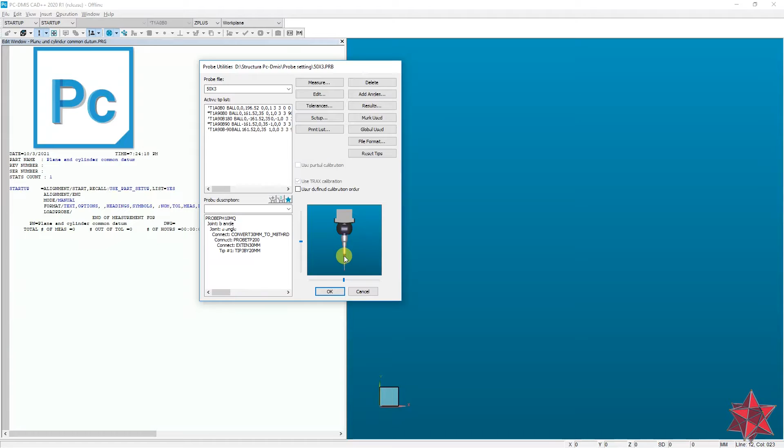The first thing PCDMIS will ask you to do is choose a probe that you want to work with. I'm going to choose this probe from my defined ones, 50 times 3, so I have a shaft of 50 millimeters in height and a tip diameter of 3 millimeters, and I will work with an angle of A0, B0.

Second, after you define the probe, you will want to set your preferences for the program. You can do this by pressing F10 on your keyboard, or by going to Edit, Preferences, Parameters. At Motion, we can set the desired prehit and retract distances. This lets the software know what distance from the surface it is supposed to go before and after it touches.

Set the move speed to 200, but if you are new to PCDMIS, please work with 80 millimeters per second to avoid collisions. Leave everything else as they are and click OK.

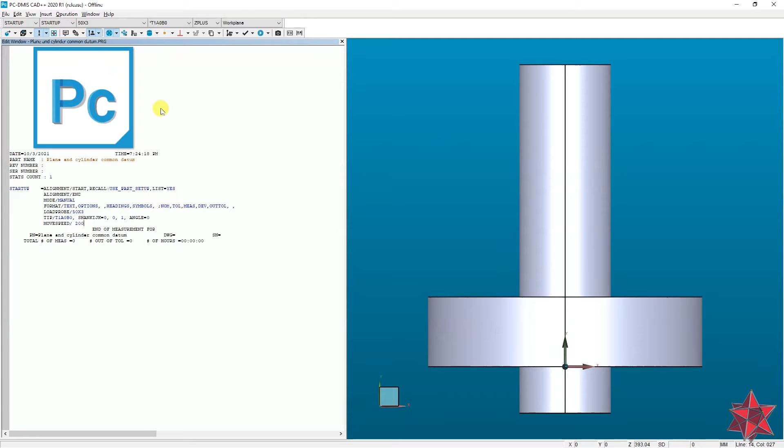Now you will want to import the CAD model. You can do this by going to File, Import, CAD, and here you will have to choose the file extension that you have the CAD with. In my case it's a STEP file, and it's already imported.

Now that we have the CAD model imported, check if the CAD model has the axis oriented as the machine axis. If it's not, then we will have to set it. So how do we check it?

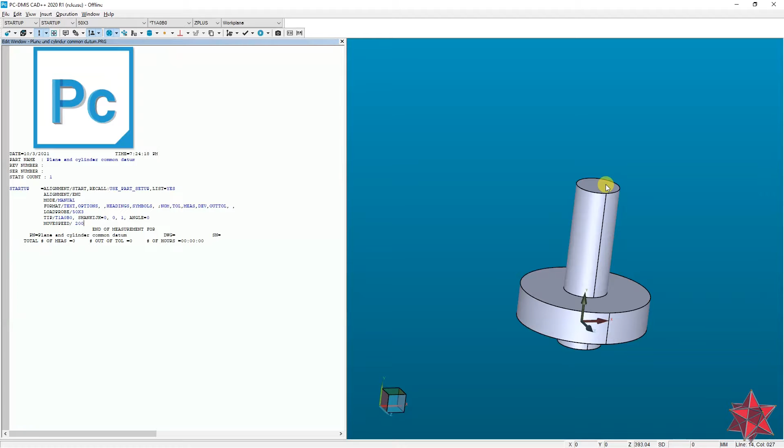We can look at the CAD model that we have here. The y-axis is represented on top of the cylinder, so this is the axis of the cylinder and the y-axis is on it, and we want the z-axis to be on top. So we have to rotate the alignment of the part on the x-axis. So how to do this?

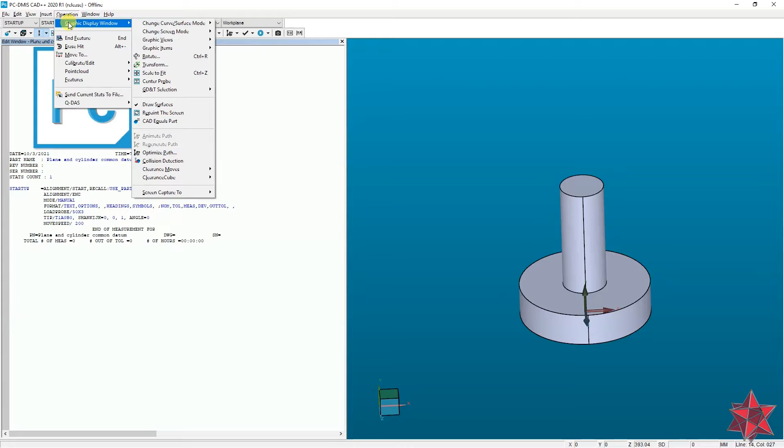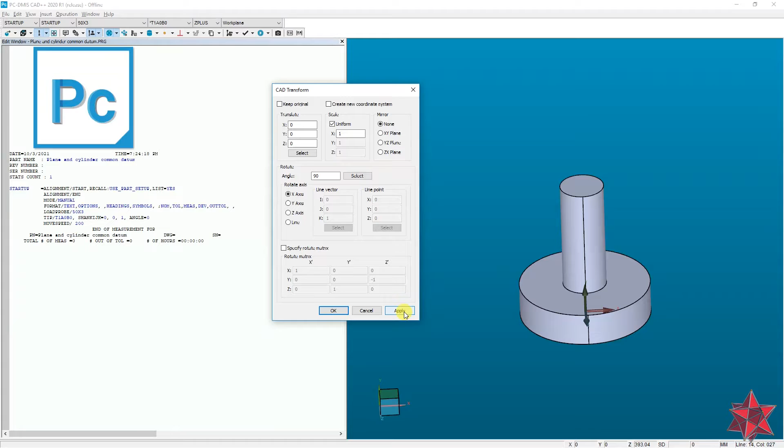Go to Operation, Graphic Display Window, and Transform. Here at Rotate, we set the angle at 90 degrees because we want it to be on the plus side, and set the x-axis. Then we press Apply, and that's it. The z-axis is now facing up.

Now keep in mind when you do transformation of the alignment that you first have to make the rotation and then the translations. So keep this in mind. Now that...

...our CAD model has the axis as we want, the next step is to define the way the machine will move around the part in order to avoid collisions. There are several ways to do that, but for now we will use a clearance cube.

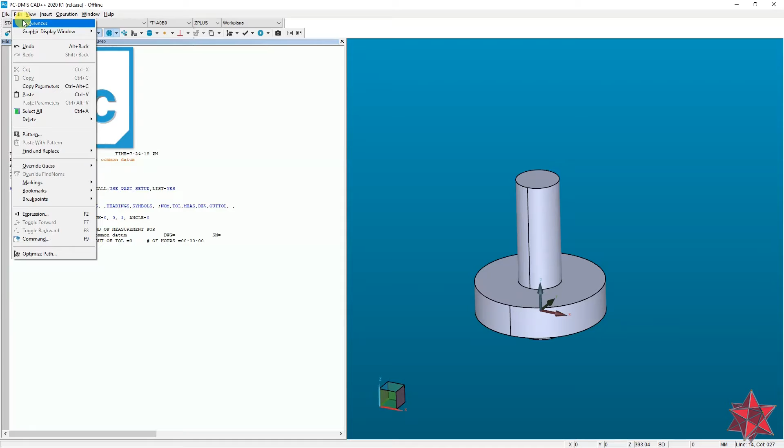So how to do that? Go to Edit, Preferences, Set Clearance Cube. Notice that the window is a simple window and it has only an offset value of 10 millimeters. That means it will make the cube 10 millimeters from all sides of the CAD model. You can also show it right here and activate it.

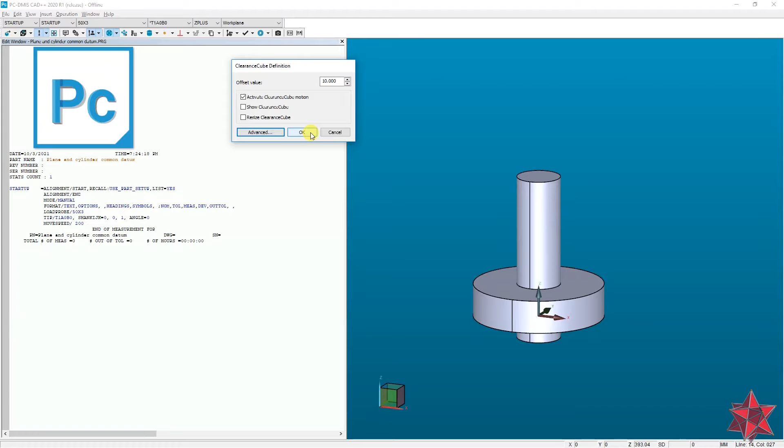Clearance cube motion: if you go to advanced, you will have more advanced features, but for now simple is fine. Just click OK. So now the probe will avoid moving within 10 millimeters of the part.

Now that everything is set, we have to let the machine know where the part is located in the measuring range. The way we do this is by making a help alignment with elements from the part and by using a few points on the elements.

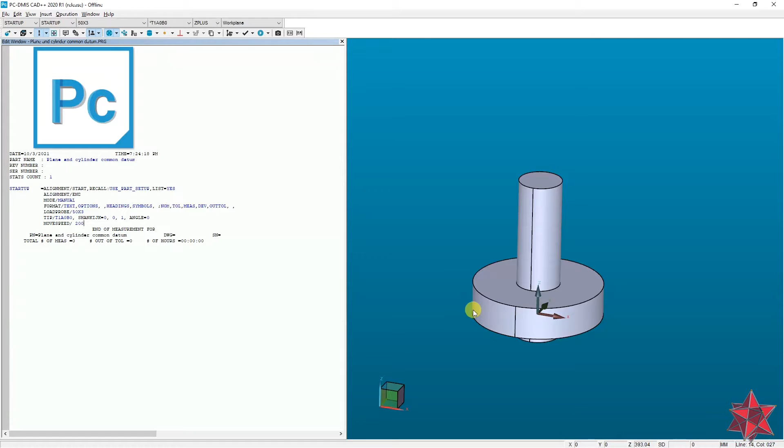First, press Shift on the keyboard and select the plane. Right here on Strategy, use Plane Circle, so it's a circular path on the plane, and click on Apply.

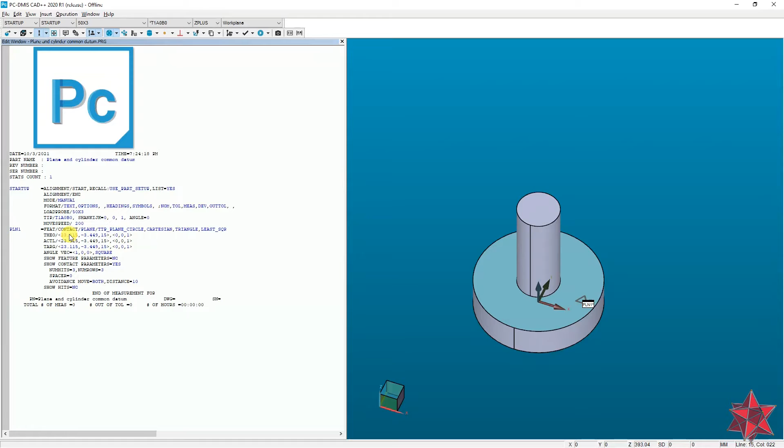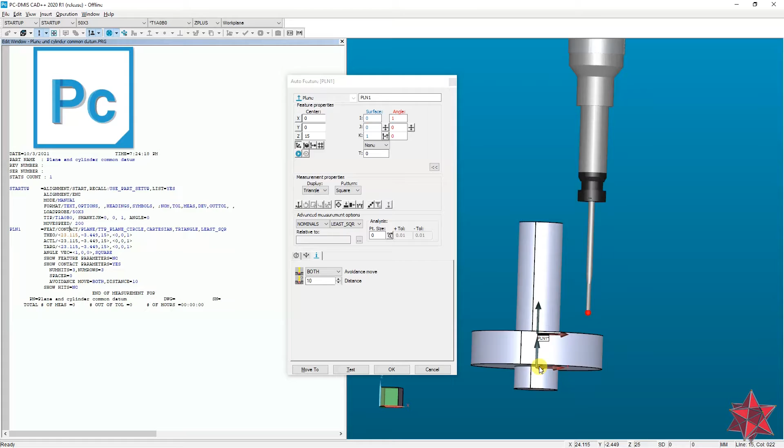Then go to the editor window, click on somewhere where the plane is, and press F9 on the keyboard to edit the plane. First of all, we want the plane to start from the middle, so we will put the nominals at 0 and 0 on the x and y axes. The plane has a height from the origin of the CAD model of 15 millimeters, as we can see on the z-axis, so we will leave it like this.

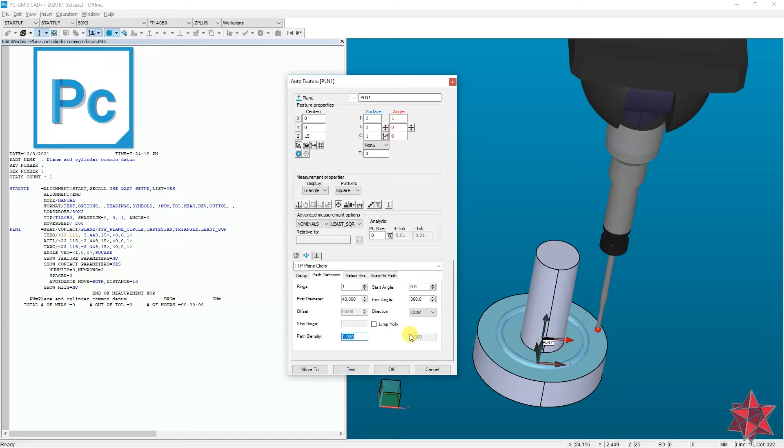Now we have to select the measurement strategy. Go to Path Definition. We only want one ring. Let's set the first diameter to 40 millimeters - yes, that's okay. For the path density, we will need few points, so we will put 0.04 at the path density to have 5 points on the plane. Everything looks good, click OK.

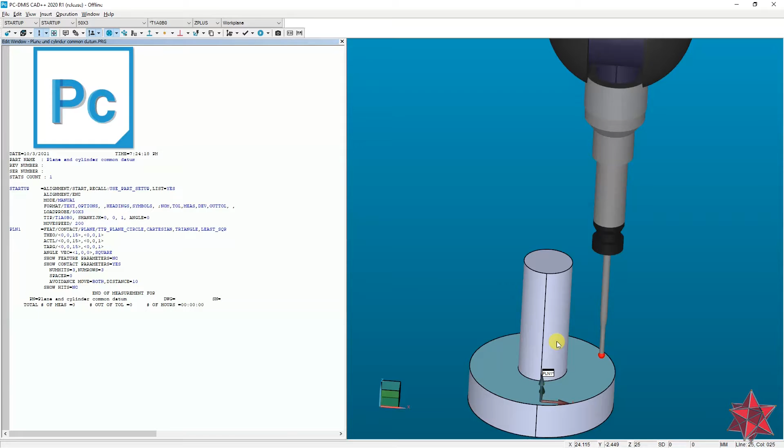Now we want to make a circle because we don't want to make a lot of points to make a cylinder - we only want to make a circle right here to move very fast through the program. So the way to do this, if you don't have the elements tab here, go to Insert, Feature, Auto, Circle.

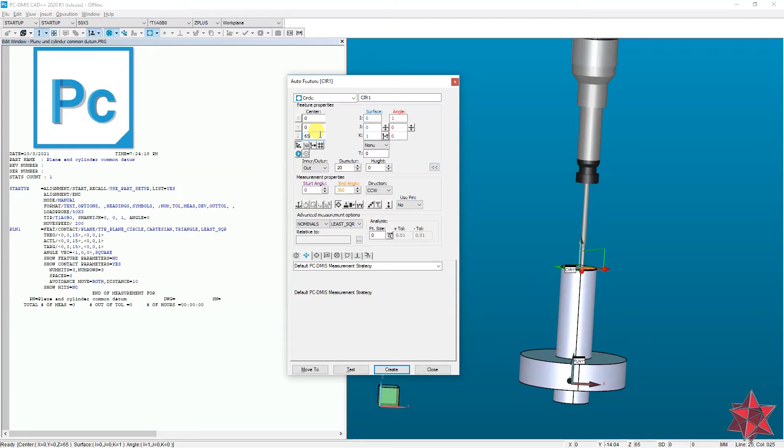Now click on the cylinder at the top, and it will put it exactly at the top. The software wants to measure the circle exactly at the top, but we don't want that, so we can see that it's at 65 at the top. That means the cylinder from the plane to here has 50 millimeters. That means if we go at 60, it will be fine, so 5 millimeters from the top.

Okay, 360. Go to Contact Path Properties. 4 points is enough. We don't need the sample points, we don't need avoidance move, we don't need anything. Just create the circle. Good.

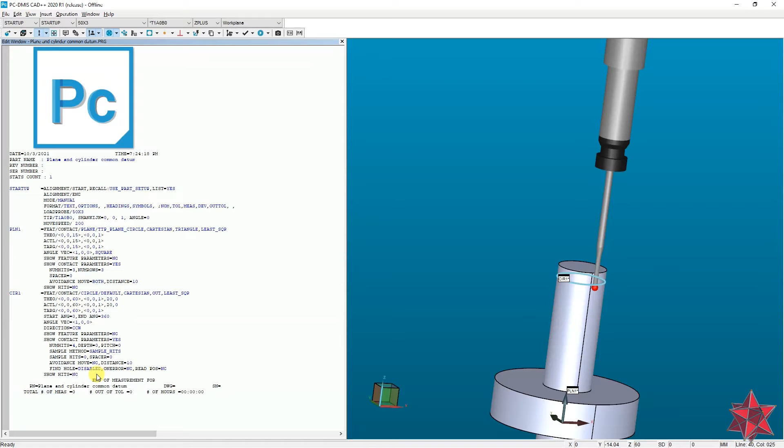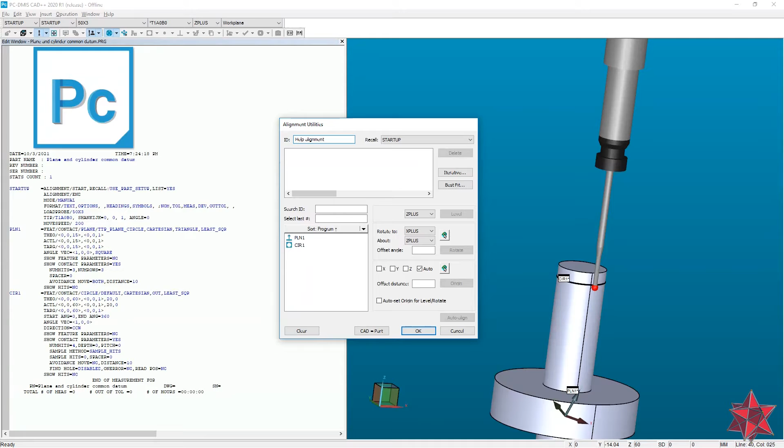Now that we have the circle and the plane, we can make our first help alignment. Go to Insert, Alignment, New. Rename the alignment as Help Alignment 1, and set the plane.

Let me just tell you that the thing I love about PCDMIS is the graphical, visual way it shows you the alignment as it moves when you set the elements. Notice this: now the alignment moves in all directions, and if I set the plane level Z plus, this took 2 rotations. So we only have 1 rotation now and all the translations, and it rotates like this and moves in all axes because we didn't take any translation. So we took the 2 rotations. Now let's also take the origin on Z axis on the plane, and the origin on X and Y axis on the circle. Now it only rotates in one direction, around Z axis.

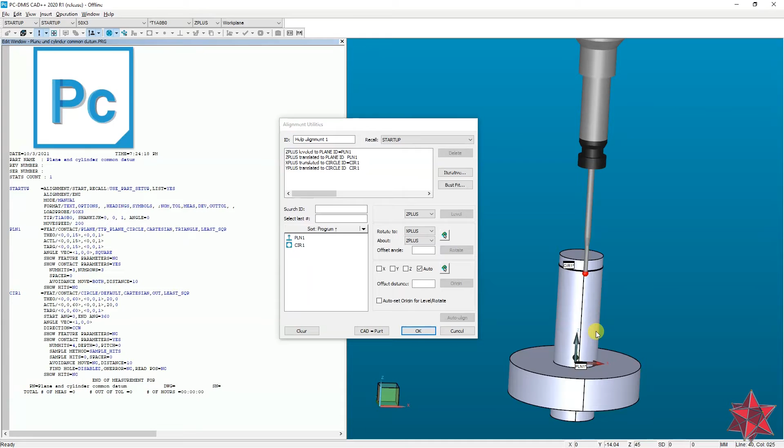Good, this is all we need for now. Now that we have the help alignment, we can work in automatic mode. So in the edit window, mode tab, automatic, sorry, mode DCC. This means automatic.

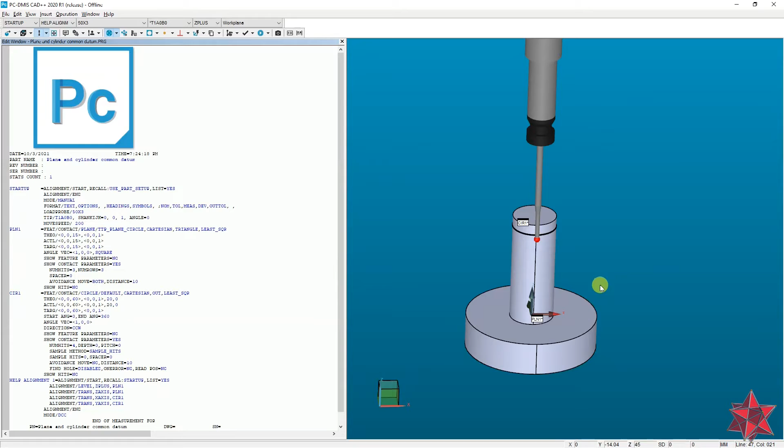We will need to do the datums again. So take the plane, shift on the keyboard, click on the plane, set again the strategy to plane baseline touch trigger plane circle, and apply. Then go and edit with F9. Make sure it's from the center, so these are the nominals, 0, 0, 0. We will rename this as datum A.

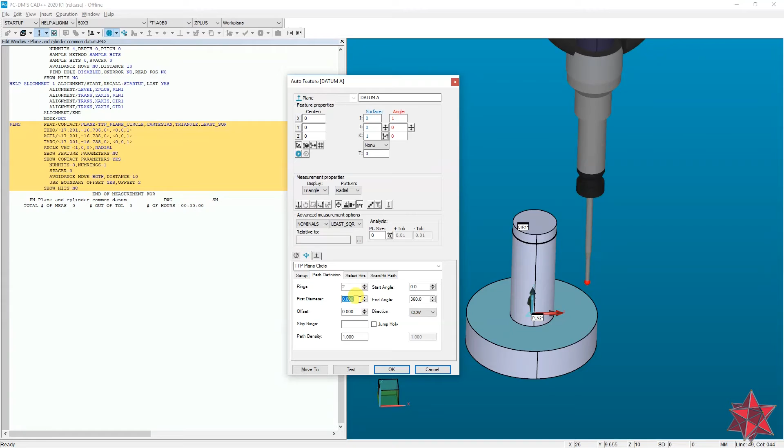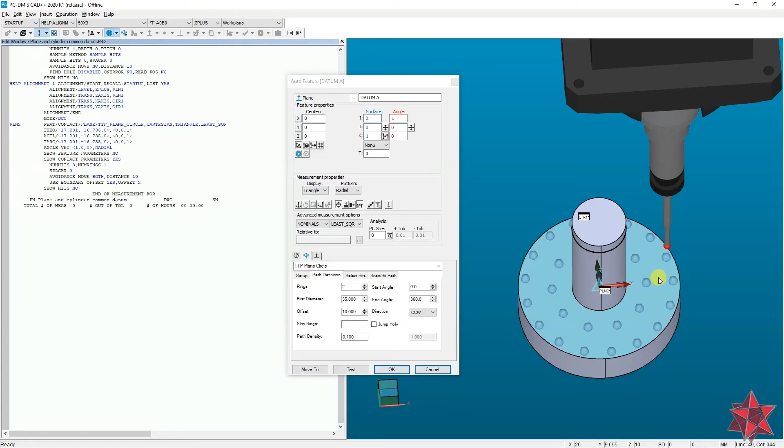Now go to measurement strategy, path definitions. Let's set to 2 rings now. The first diameter, set it to 35, and the offset, let's set it to 10 millimeters, so it's 45. Let's set path density to 0.1, I think that's enough. Yes, okay, good. This looks good, whole surface is covered, everything looks fine.

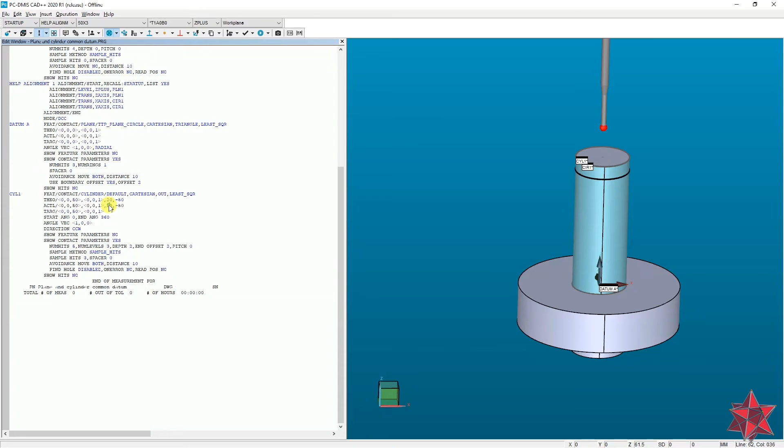Now we will need to set the cylinder. Shift and click on the cylinder, click apply, then go and edit the cylinder with F9. Check if the nominals are fine. Everything looks good, it's a 50 millimeter height cylinder, so it's okay, it's on 0, everything looks okay.

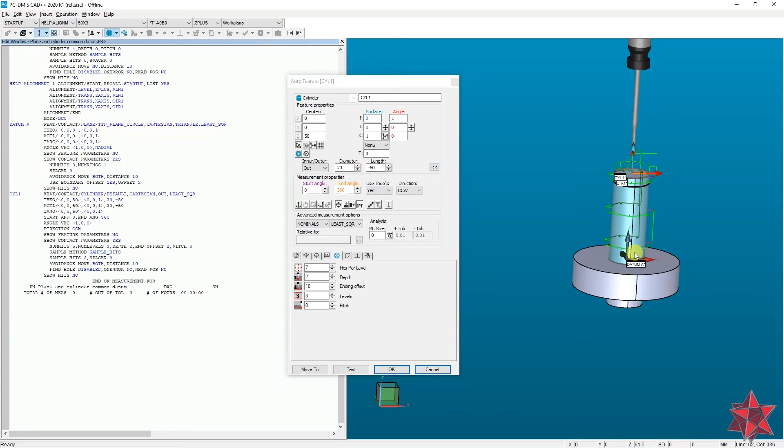Go on contact path properties, let's see hits per level. Okay, so set 7 hits per level. First depth 2 millimeters and second depth 10 millimeters. The second depth is from the bottom upwards, and if you remember, we took a probe of 50 millimeters, the height of the shaft, and the height of the cylinder is also 50 millimeters, so 10 millimeters from the ground is safe, we can use it. Good, 3 levels, that's fine.

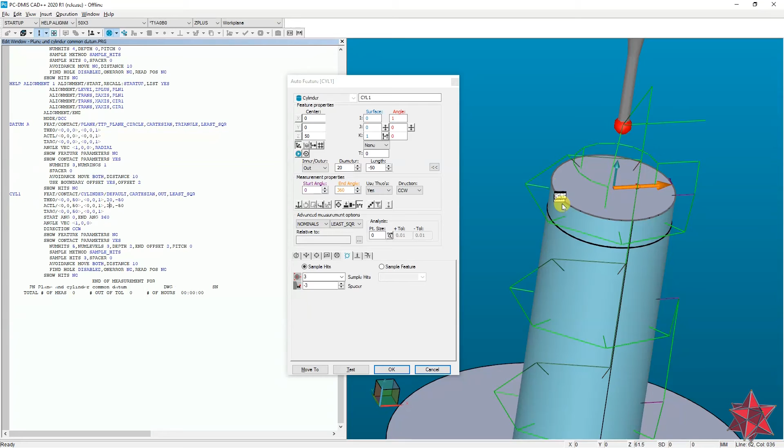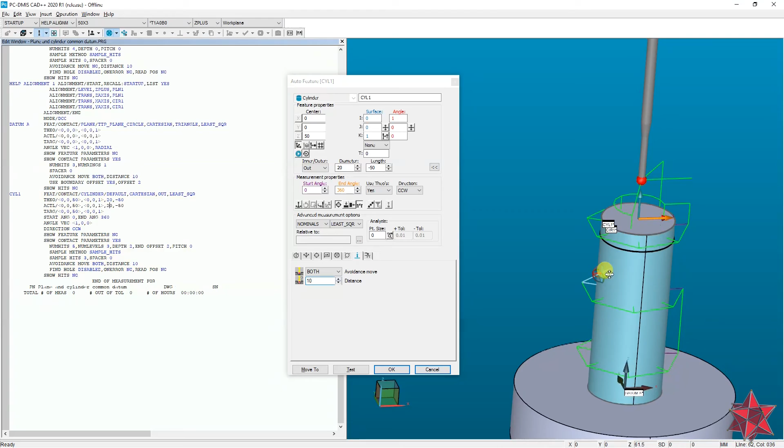Also go to contact sample hits properties. We have 3 sample hits on top of the cylinder, this lets the software know it starts from here, and let's set the 3 points at minus 3 millimeters. So what that did is it went inside 3 millimeters from the edge to make the contact, the 3 sample points, the plane. And go to contact auto move properties and set the avoidance move at both, with distance at 10 millimeters. This lets the probe know it needs to go 10 millimeters before it goes to the first point, and 10 millimeters after it takes the last point.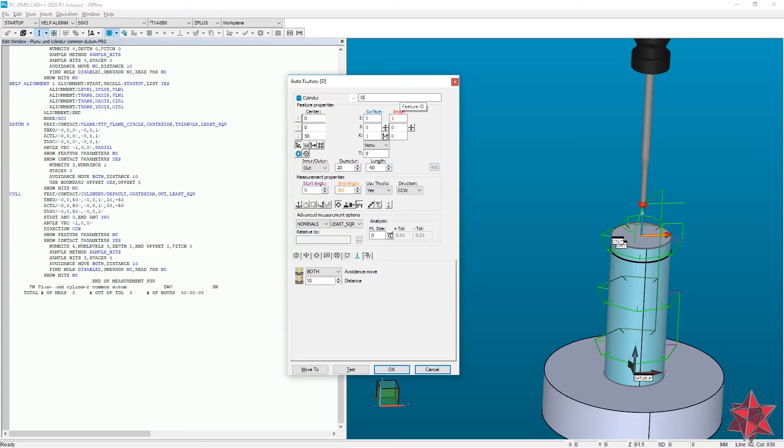Good, everything is fine. Now just rename this as datum B, and it's okay. Good, everything looks good.

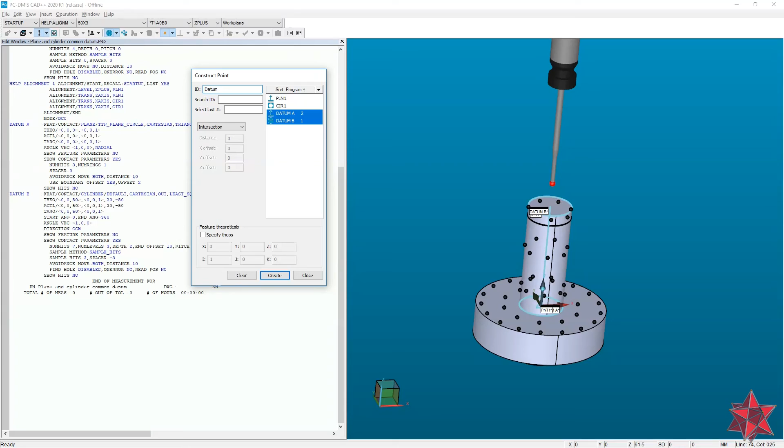Now that we have this, we can make the common datum. In order to do this, we will need a construction point, an intersection point. Go to Insert, Feature, Constructed Point. Now first set the cylinder, so this is the axis, then second set the plane in order to intersect the axis of the cylinder with the plane. Put here intersection, and rename as datum A minus B. So this is common datum A minus B, and create.

Good. Now that we have all our elements, we can go and construct our final alignment. So Insert, Alignment, New, this will be A minus B. Set the plane, datum A leveled on Z plus axis, and origin X, Y, Z on datum A minus B, common datum.

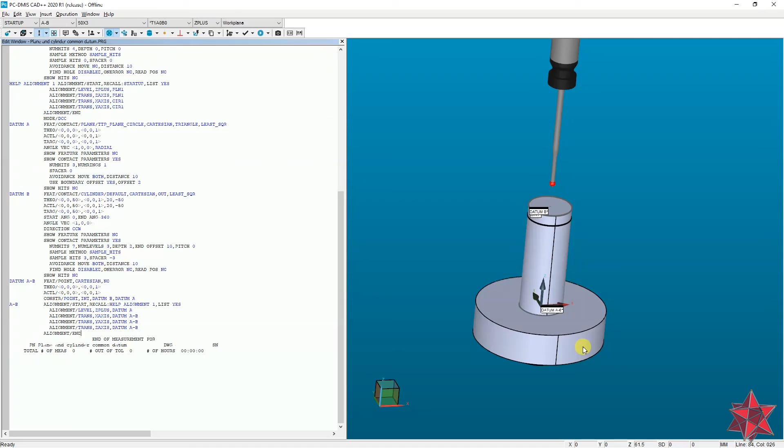Okay, good, very good. Now that we have this, we can check the collision and continue with whatever elements we need to measure from the drawing. So: operation, graphical display window, collision detection. We wait.

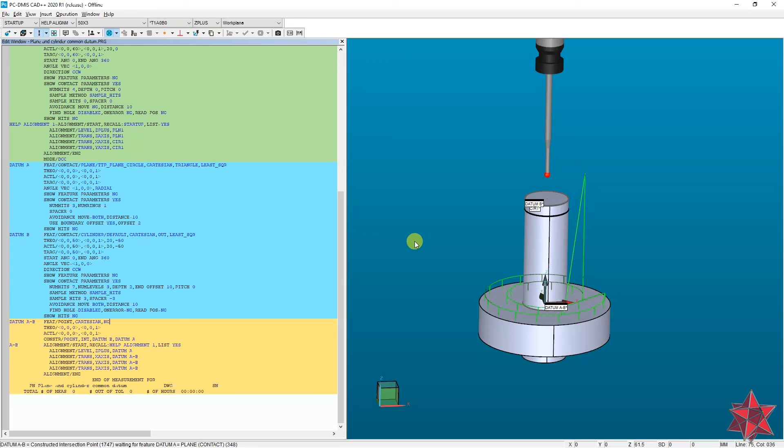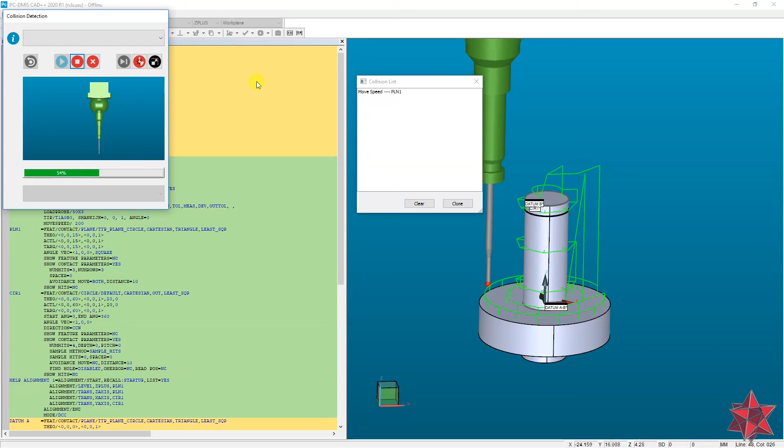Okay, this is manual, so we have to continue manually. Good, no collisions detected, everything looks fine.